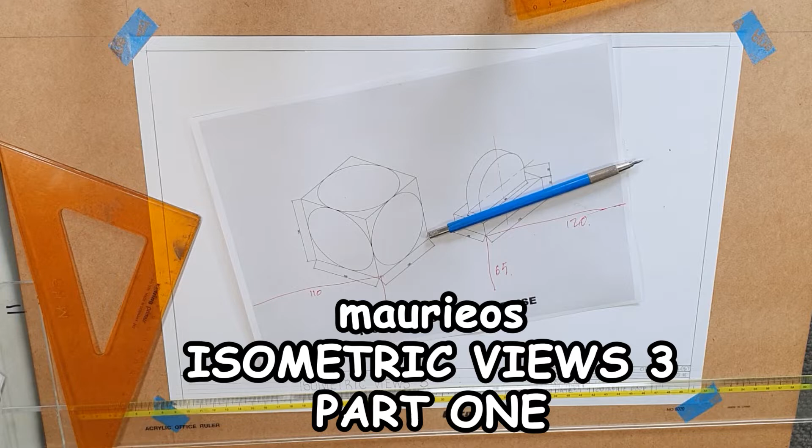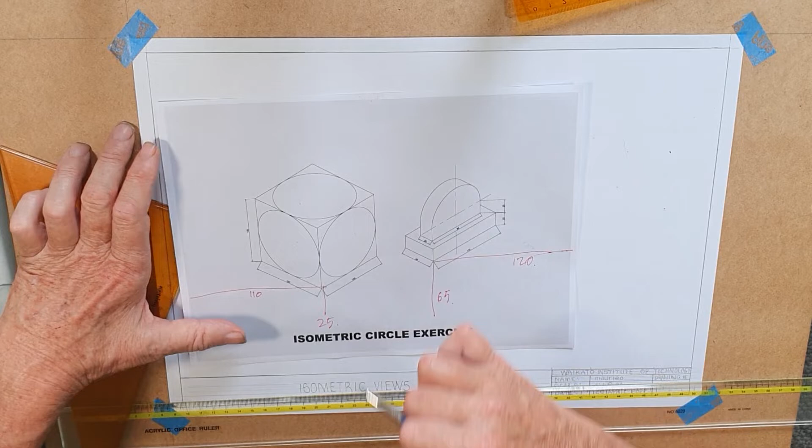All right, here we go. Now these are a couple of exercises that I have added into the Moodle site because I realized that I hadn't actually drawn any isometric circles. So the first one I'm going to draw is the classic isometric, well, I'm calling it the Isometric Cube. So it has an isometric circle in each of the three visible faces of the cube. It's a 100 mil cube, and it's 110 in from the side of the page and 25 up.

So let's see what we can do here. That's 11, 110 is about there, and okay, we'll put that there, and let me see now. 25 up is right there. Okay, so there we have it. We're off. Okay, first some glasses maybe.

Right, so let's draw a 100 mm cube. Okay, so we'll put that in there like that. 100 mm cube, and we'll put that up there like so.

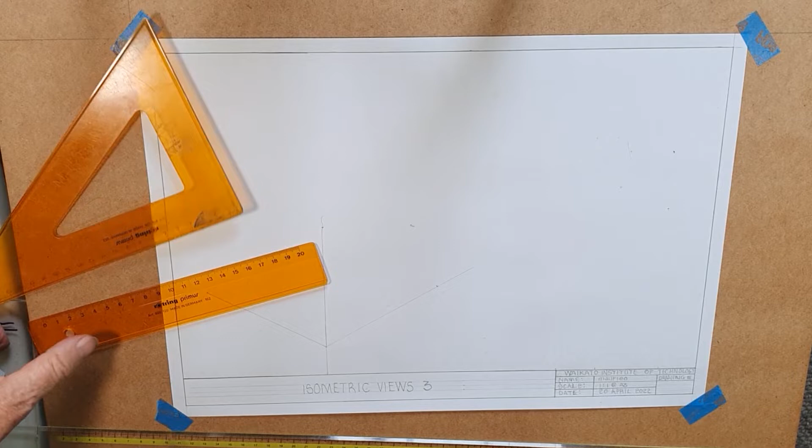Right, now all we need to do is measure off 100 millimeters. It's 100 there. That's 100 there, and that is 100 there. Okay, right, and there we go, there like that.

So that goes out there like that. That goes out there like that. This goes 100 up there like that, and 100 there like that. That should pop out to there like that. And then this one here should pop out to here like so. And there we go. Right, so that's our cube drawn.

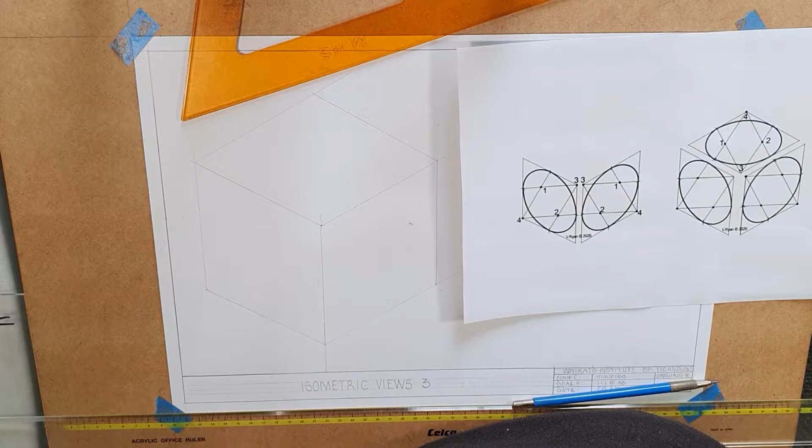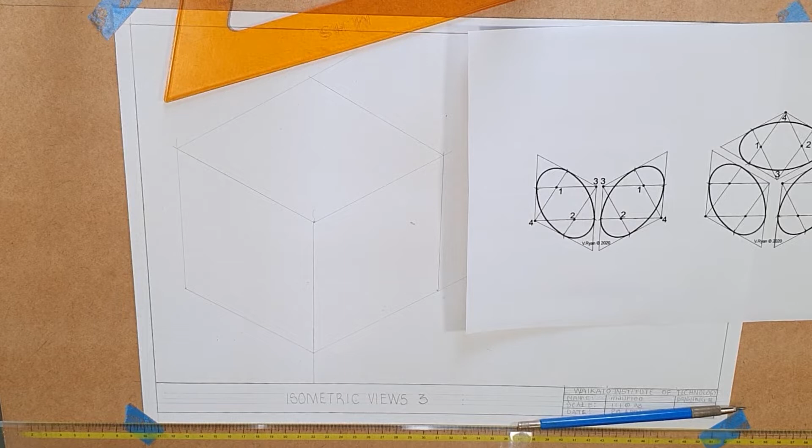And we're back. Are we back? I don't know that we are. I don't think so. Oh yes, we are back. And what I've got here is just some simple guidelines as to how to draw this, so that we can get a bit of practice in for this. So yes, we're back.

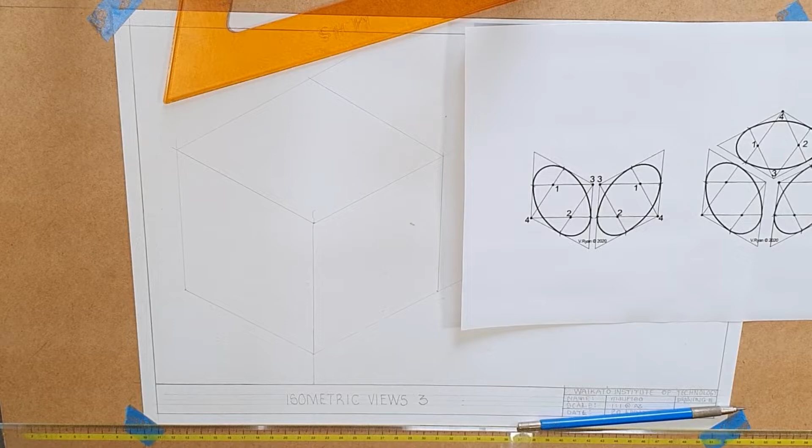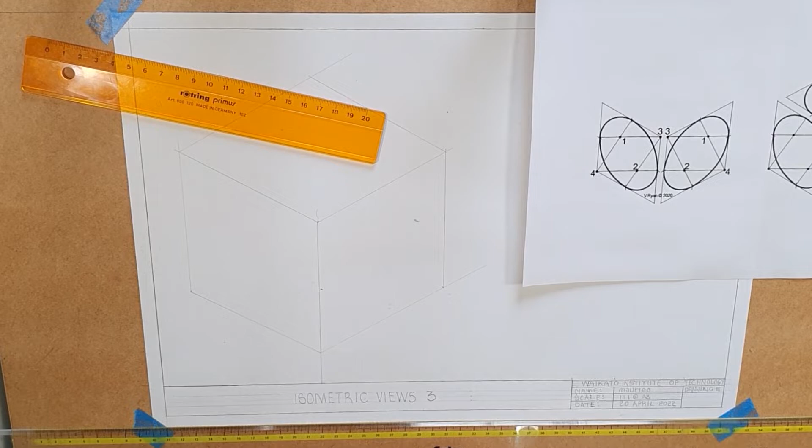Right, so these are the guidelines that we need. We need to mark the center line of each of these here. So if we say, for instance, mark that one there, it's 100, so 50 will be there. So that can get us like that there. Okay, so that gives us those center lines there, and we'll mark another set of center lines here, like so. So that one there. So let's get this one here done.

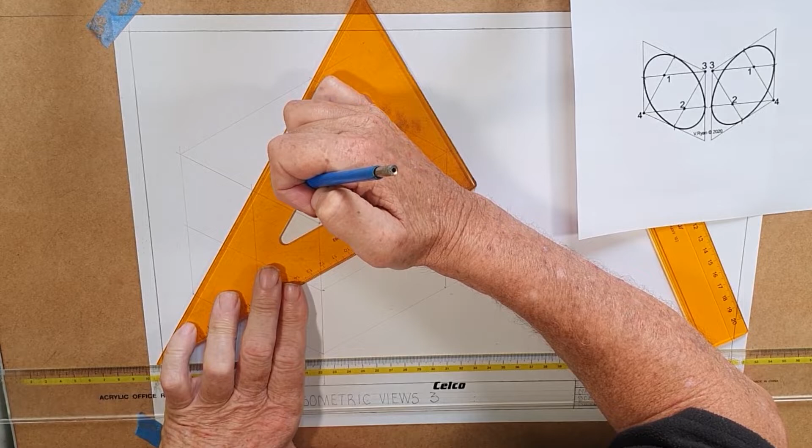Right, so once we've drawn three of these, we should be then deemed to be experts. Okay, like that there. Now, from this corner here, we join to that side. Join that to that side and to this side. So these two points here are on what we call the short diagonal.

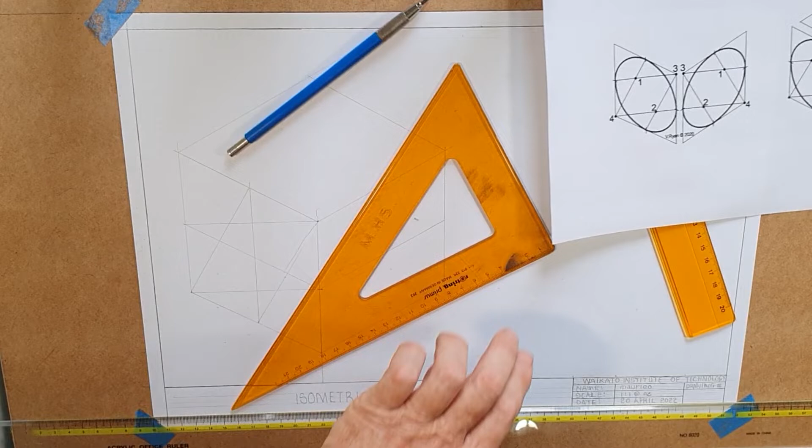So that's these are the short diagonals, and they go to the midpoint of the other side. So we take the short diagonal, midpoint of the other side, the shortest diagonal, this here being the longest diagonal. So they go to the midpoint of the opposite side, or the opposite sides. Okay, so they're the right. Oops, a bit AWOL there. What happened there?

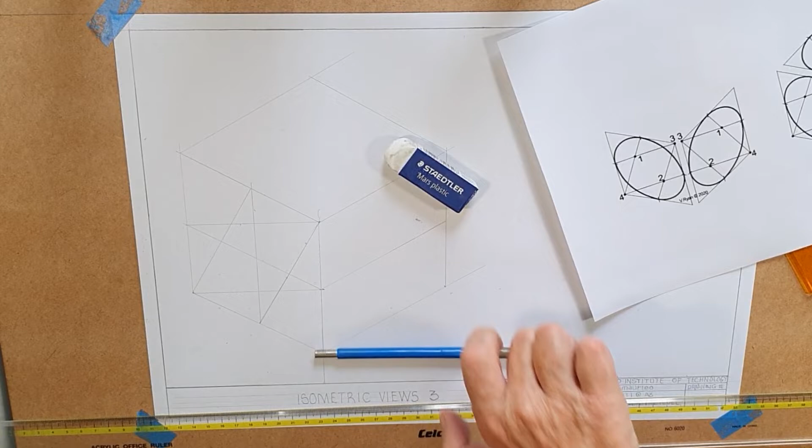I might just draw that in a wee bit better. There we go. Now that gives us these points. We've got one here, at the intersection there, and another one there.

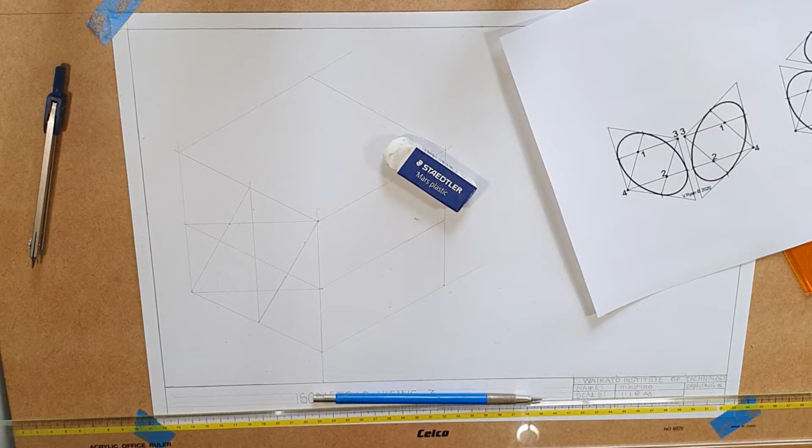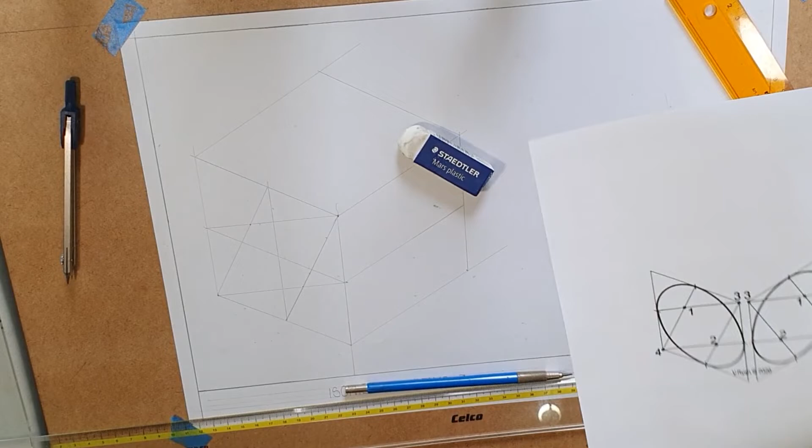Okay, and then we're going to use the other two points, which are the ones that we drew from, which are the short, what we call the short, well, I'm calling the short diagonal. So I've pricked those through, and now we find our compass. Been a while since we've used the compass, so need to locate it. I think I had it there a moment ago actually. Oh, here it is on the drawing board.

So then we draw these two short circles which go from here. They're the smaller ones. So we're drawing an ellipse. So they go there like that. Okay, there's one drawn there, and then this one here. Now what I do, I get that end right. Yeah, that looks pretty good.

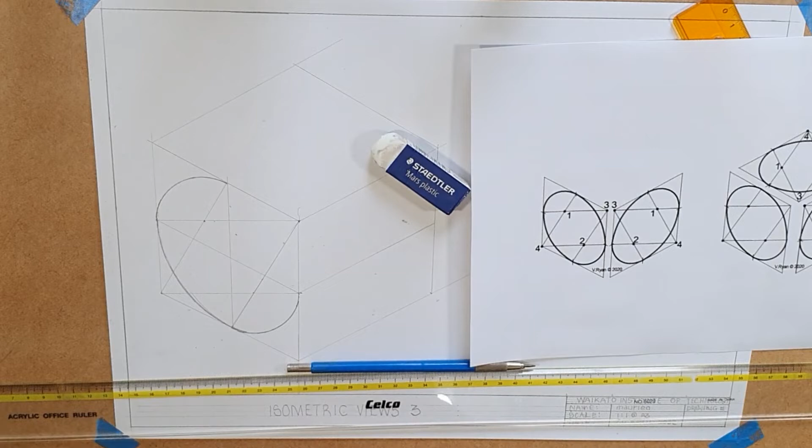Okay, and then the second part of the ellipse comes from here. These are the long arcs and they come, there we go. Something like that, with a little bit of help there, and there, and then one more in here.

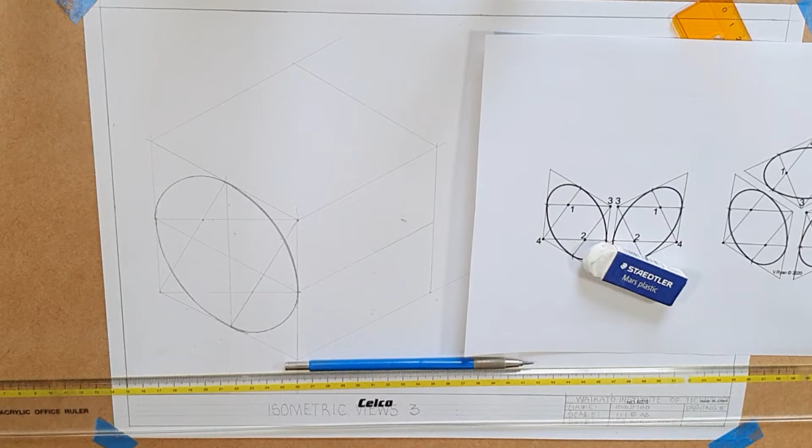And that's one drawn, number one drawn. Yeah, it's as good as it's going to get. Okay, and that's my first isometric circle I think I've drawn for this one.

So what one will I do next? I think I'll do that top one. Let's go for gold, the top one. So let's put that in, find these midpoints. So that should be the midpoint there and there. So we might actually get away with not having to draw those in, keeping down the amount of construction that we need.

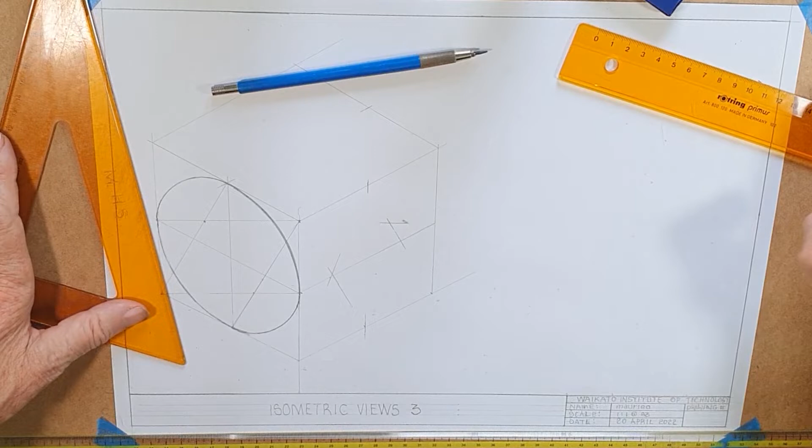Okay, so there are 2 points. The concept here is to learn as you go along. And the one thing I don't seem to learn is where to put the pricker. So obviously the long circles will go from there. Prick that one there very well.

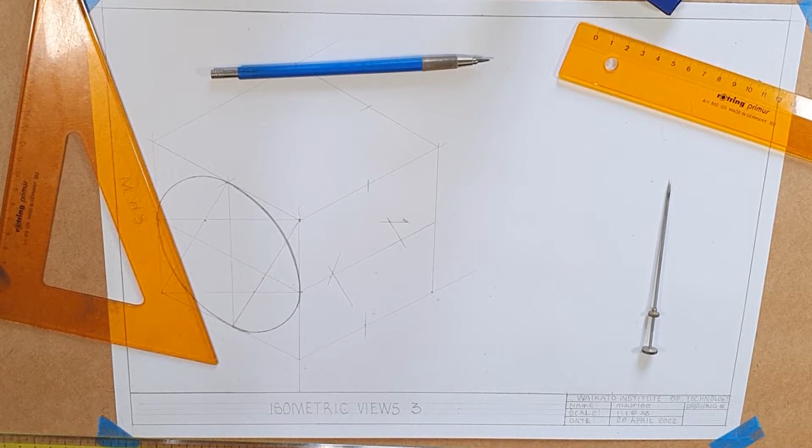And we need to know the points that they're going from. Okay, so this one here, that's what I haven't got in here. It's going to go from, no it doesn't.

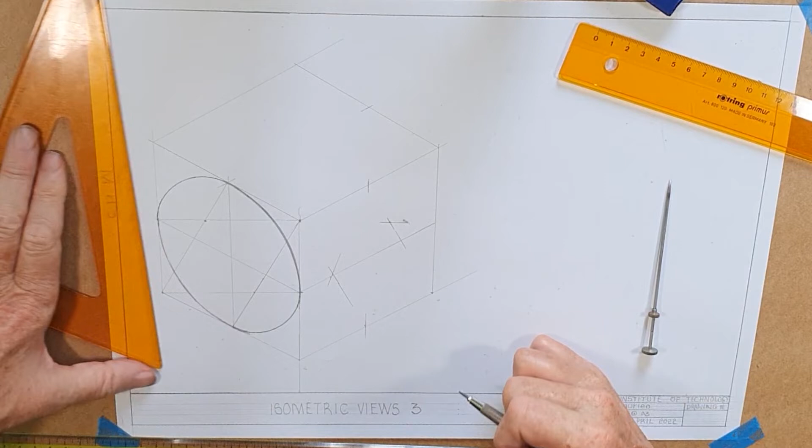Yes, perhaps I do need to draw those in more fully so I can get a better idea of where these circles, oh, that one goes from there to there. That's right. And that one from there to there. I've drawn that one wrong.

And this one goes from there to there, so I should go around there. And this one here, from there to there, and this one here go from there to there, from there to there, and this one from there to there. So yes, it does take a little bit of, so this is the point here. I got that one wrong.

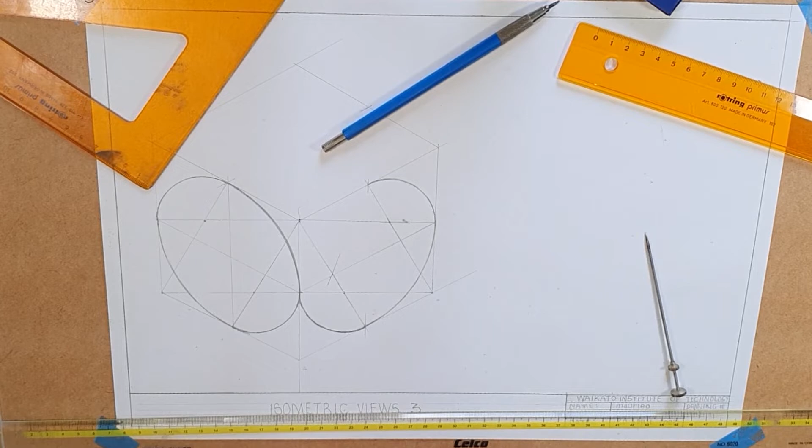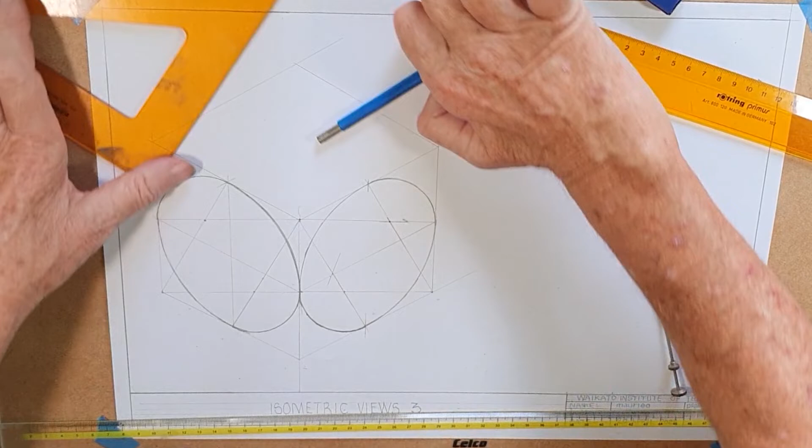Okay, and this one here goes from there. Oops. Okay, and then we'll put this one here. There we go, our second isometric circle there. All right, so yes, it would seem that drawing those sides in is a good idea.

All right, so now we'll just put these in here. So that's there like that. Through there like that. And this one here through there like that. Then we find the short side and go to the opposite two sides, there and there. And then we go from this one to there.

And this one to there. Right, and so that gives us these two, this point here, yep, and this point here. Right, we've already got that point there sorted, and this point here, 4-point ellipse.

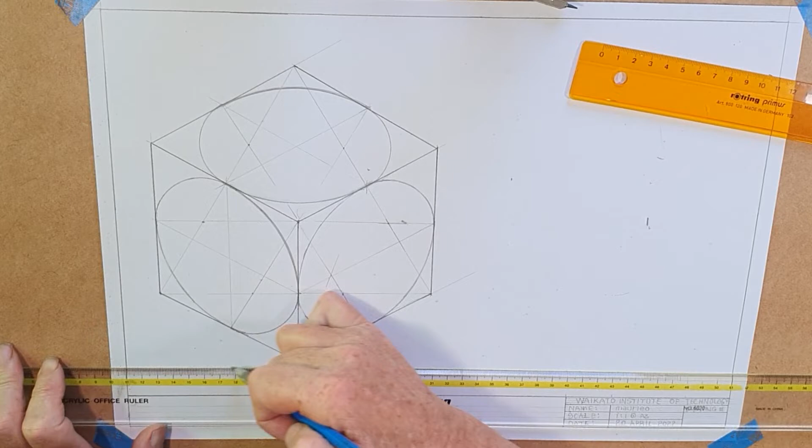Right. There we go. Well, that was an interesting little exercise there. I'm going to call that, we'll just put that there like that, and we'll do an 8mm down here. And we'll call that one, okay.

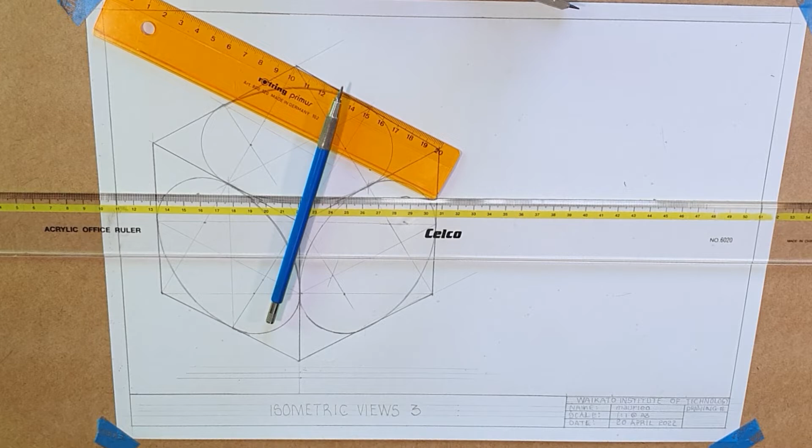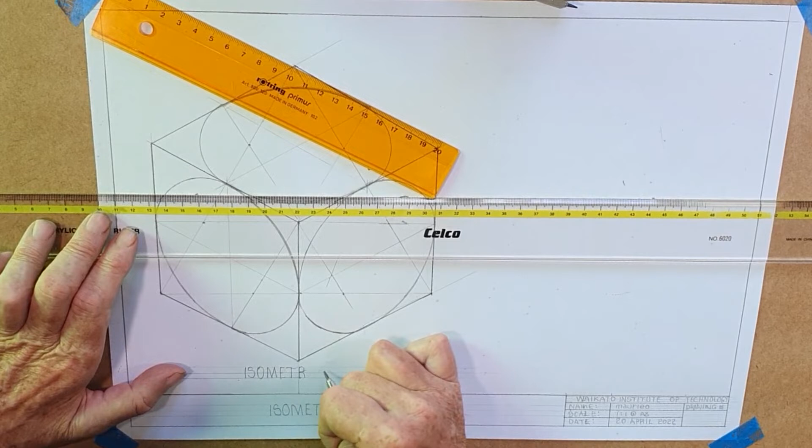And that's going to be called, just let me do a little consultation here. My last drawing, isometric, I'm going to call that isometric view 3. So this will be isometric view 4.

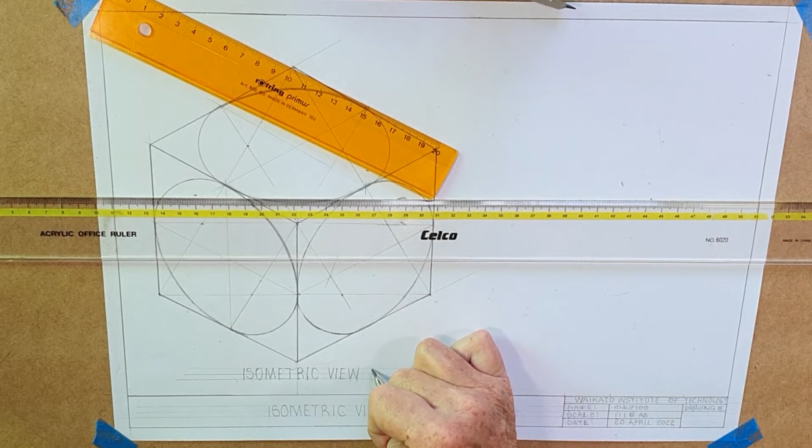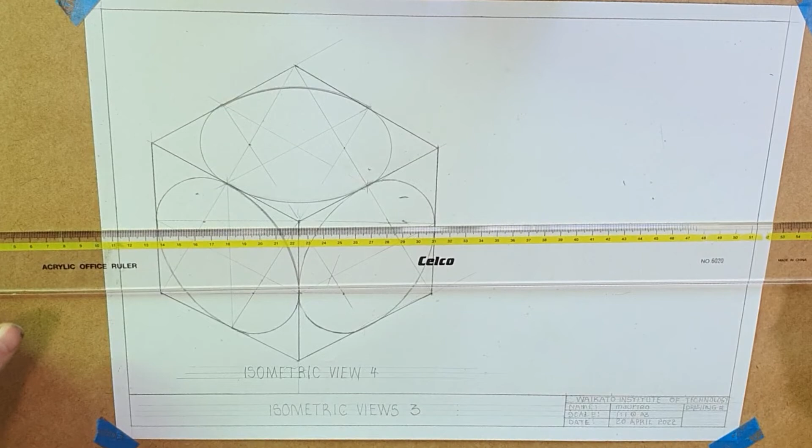Okay, and I'm going to leave that isometric view there and stop the video there for that one, and we'll publish that. Just give it a little dust off here. Yes, interesting. I learnt a lot from that.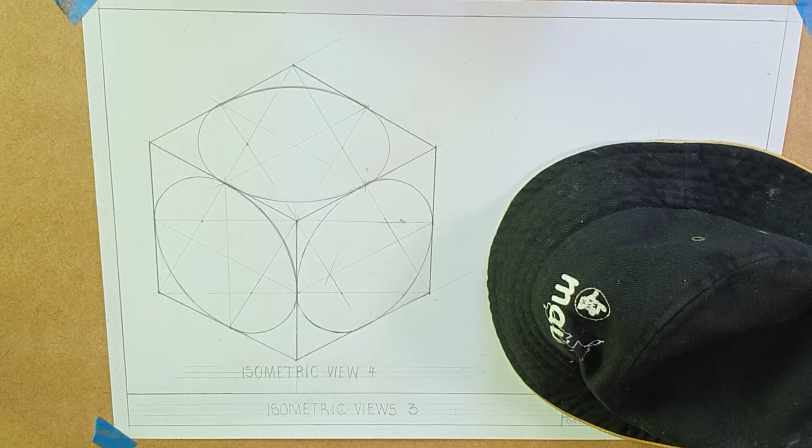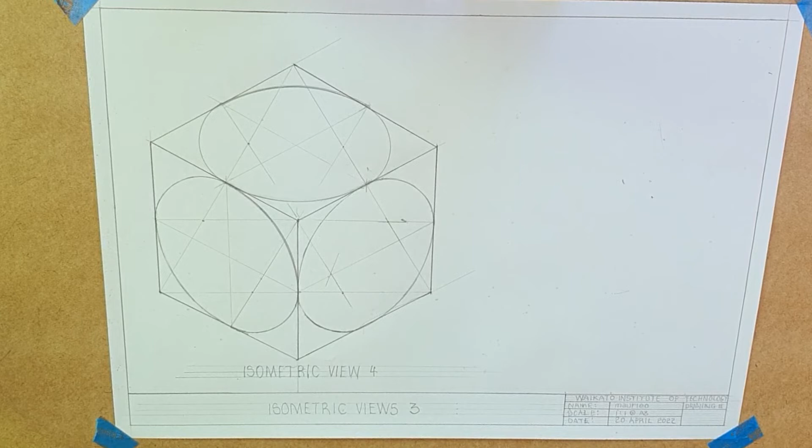I think now I can draw the isometric ellipse using the 4-point method reasonably okay. So yeah, the thing is to get your square that it's going to fit in isometric terms, and then work out your long and short diagonals, put in your things to determine your 4 center points, and then away you go.

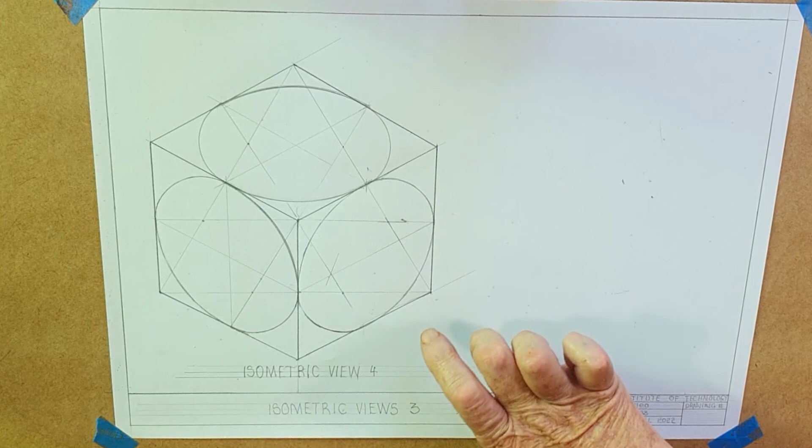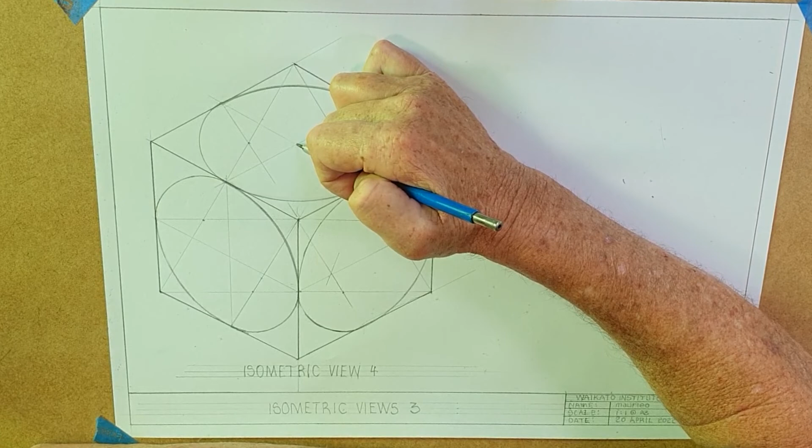A half circle. Well, where would the half circle? Well, it'll depend, wouldn't it? Just looking at this here, if we just, well, perhaps if we can look at this top one, there would be the half circle from there and there. So it would be a long and a short, and a long and a short, as it would go. Yeah. And the center of the circle, of course, in terms would be there.

So, yes, here we go. That way, I think. Yeah. Marvellous, bloody marvellous.